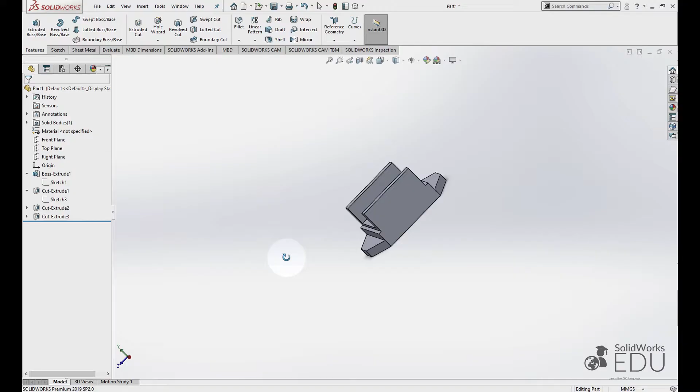Select this area, sketch, use a line.

Don't press escape. Take your cursor somewhere here, bring it back. You see that yellow symbol here? That means that my line changed to arc.

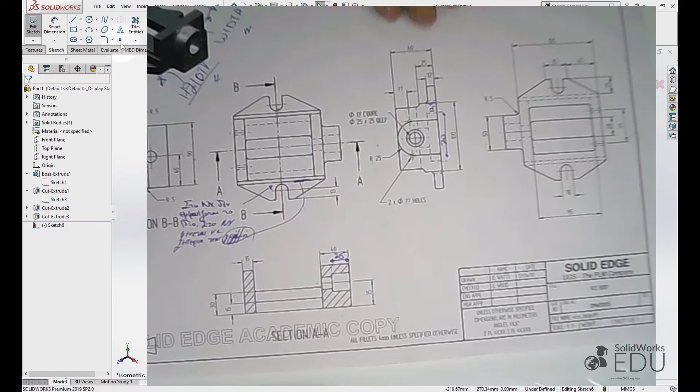Okay, to this line and close it. Escape. Now, as we can see here, this is an arc of 25. Enter.

Select this point, hold Control key at the keyboard, select the origin, and make them vertical.

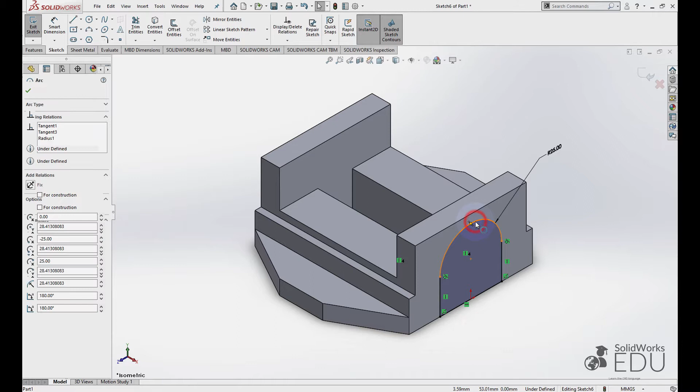Select the arc, hold Control key at the keyboard, this line, and make them tangent.

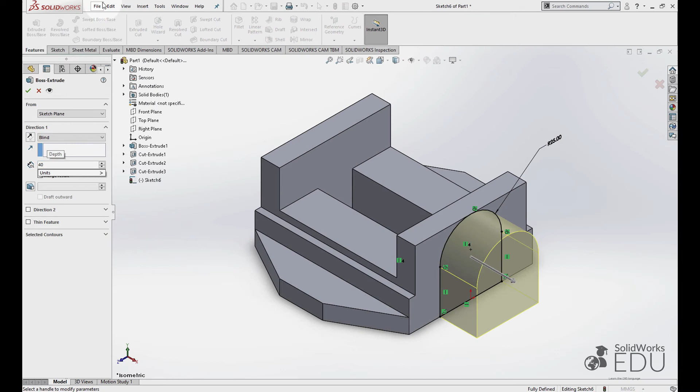Features, Extruded Boss, and as you can see here, is 40. Okay.

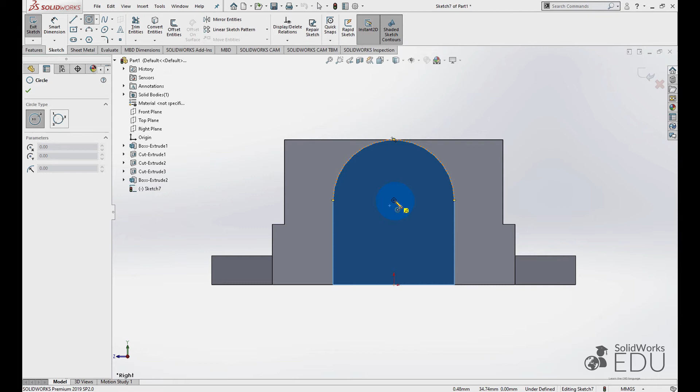Select this area, select sketch, select this circle, smart dimension.

There are two circles. The one is 25 times 25, 25, and Extruded Cut 25 deep. Okay.

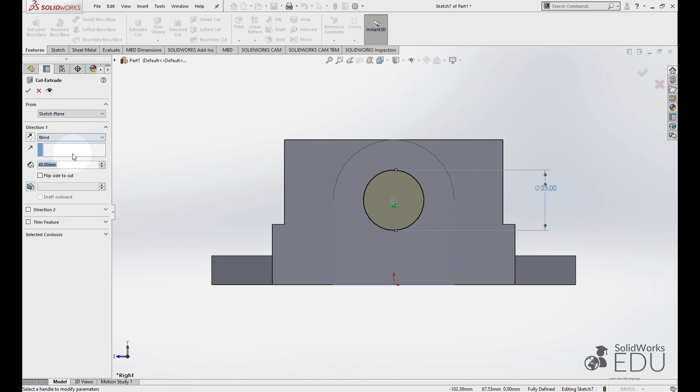Select this area, select sketch, select circle, tab here, smart dimension, and tab here, 17.

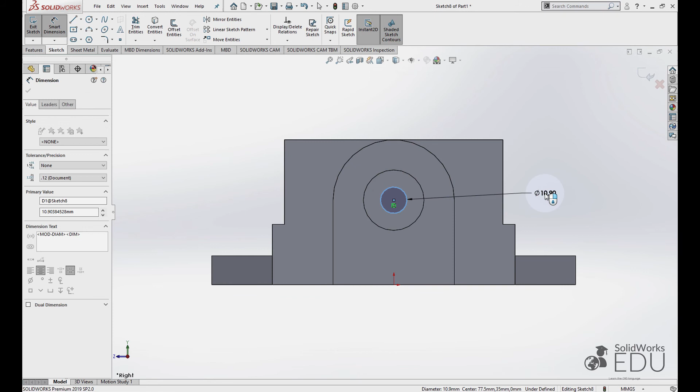Okay, Features, Extrude Cut, up to surface. I select the surface here. Okay.

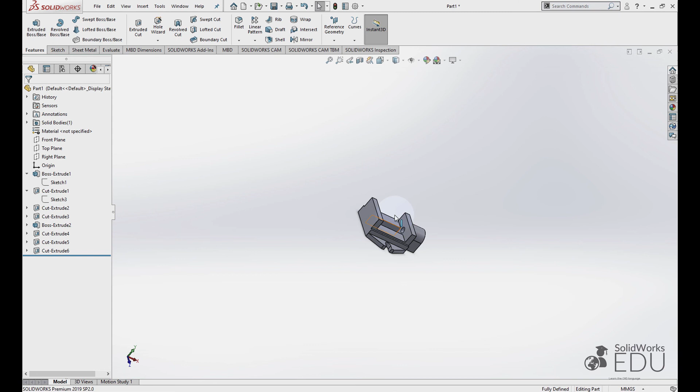This bit here is not 40, it is 25.